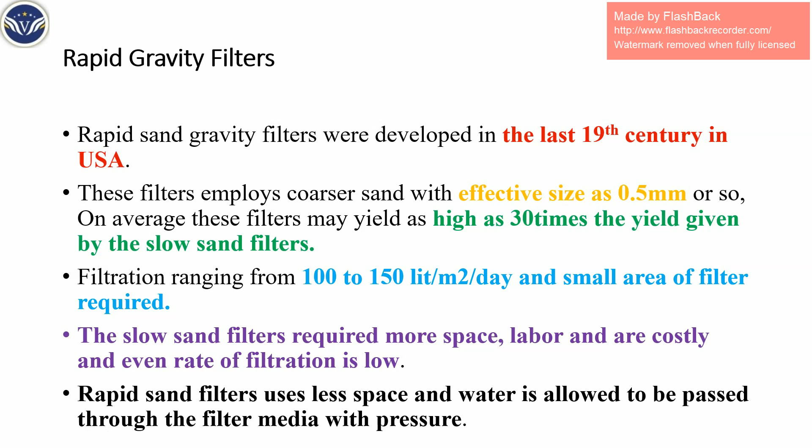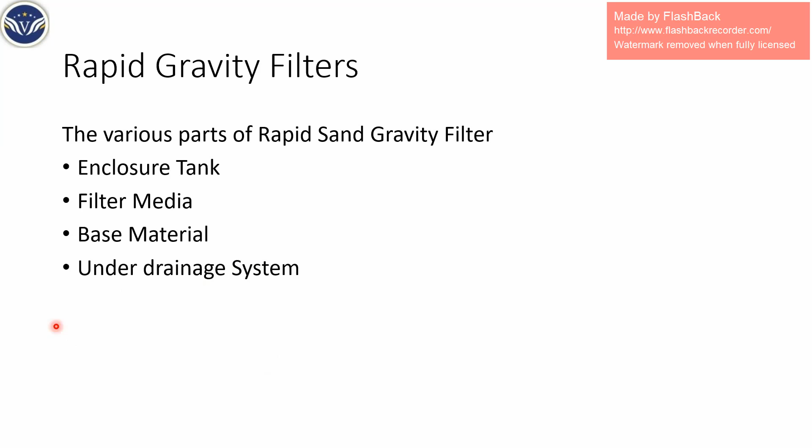So the rapid sand filter requires less space, and water is passed through the filter media with a certain pressure. Now, the rapid sand filter consists of various parts. The first one is an enclosure tank, then filter media, base media, and the under drainage system. We are going to see these one by one, and the under drainage system has two objectives, which we will also see.

The enclosure tank, as in the slow sand filter, is a watertight rectangular tank built of masonry and concrete. The depth varies from 2.5 to 3.5 meters, and for each unit the area is generally limited to 10 to 80 square meters.

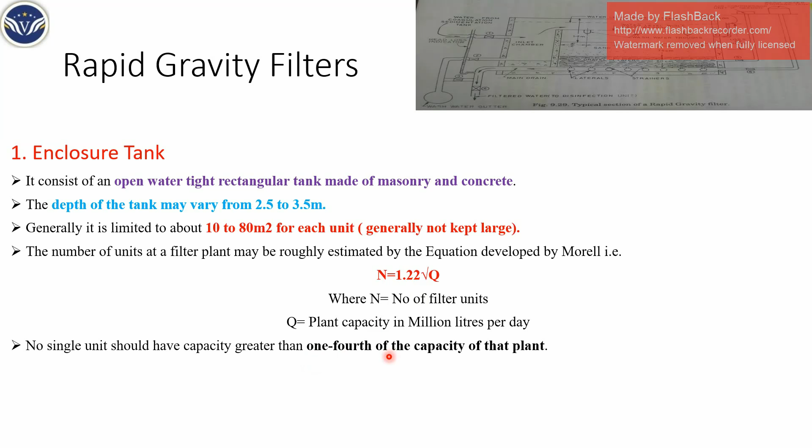Here is an equation to find out the number of units. n is the number of units, and we can find it using this equation: n = 1.22 √Q, where Q is the plant capacity in million liters per day. No single unit should have a capacity greater than one fourth of the capacity of the plant. So we use this equation here.

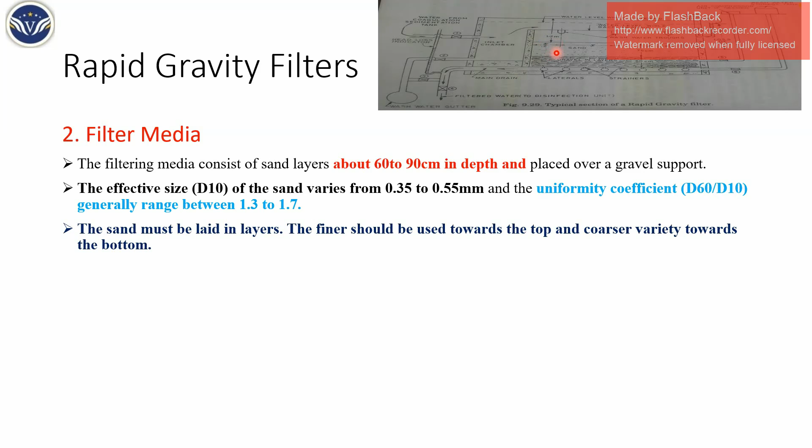Next one, the filter media. The filter media generally has a depth of 60 to 90 centimeters, and it is supported by the gravel media. The effective size D10 varies from 0.35 to 0.55 mm, and the uniformity coefficient D60 by D10 varies from 1.3 to 1.7. There is fine sand at the top and coarse sand at the bottom, and it must be laid in layers, generally around 3 to 6 layers.

The base media, or base material. The base material supports the fine sand, or filter sand media. It is laid in around 5 to 6 layers, and it should be free from dirt, clay, and any organic matter. It should be hard and durable.

The top layer is about 15 centimeters and the grain size is between 2 mm to 6 mm. The intermediate layers are again 15 centimeters and 15 centimeters, and the grain size varies from 6 mm to 12 mm and 12 mm to 20 mm. The bottom layer should be 11 centimeters, and the size here varies from 20 mm to 50 mm.

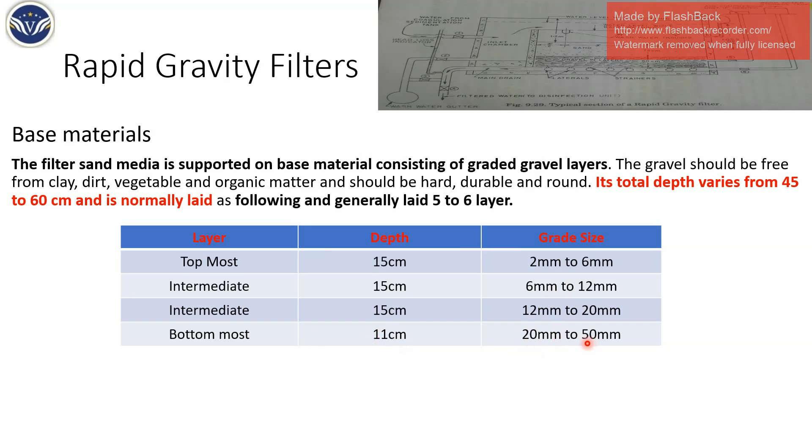The under drain system. So here the unique part of rapid sand filter is the under drain system. In slow sand filter, the under drain system is used only to receive the treated water and to deliver it to water supply lines. But here it serves two purposes. One is it collects the water which has been filtered. The other one is backwashing. So it helps in cleaning the filter. Backwashing is nothing but it will help the filter to clean itself.

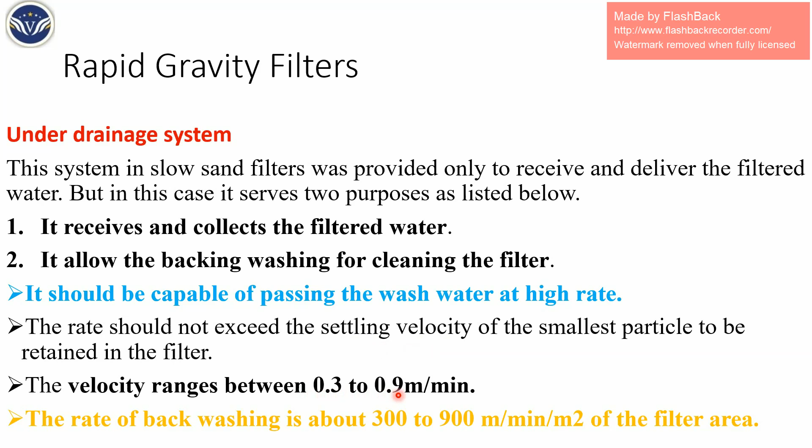It should be capable of passing back water or wash water at a very high rate, because only when you pass it at a high rate can the cleaning take place. It should have a non-settling velocity. Please remember this thing. And the velocity will range from 0.3 to 0.9 meter per minute.

Next one, under drain system. Here it has got two drainage systems. One is the perforated pipe system, another one is the pipe and strainer system. Again they have got various forms, like manifold and lateral system, Wheeler system, and porous plate system. These are the different systems.

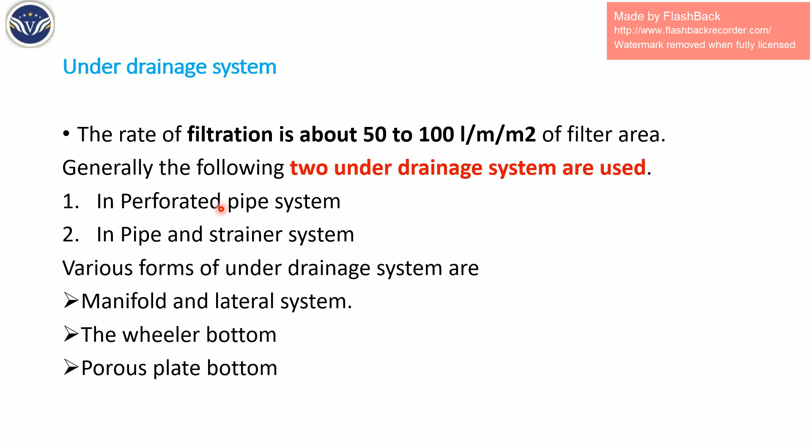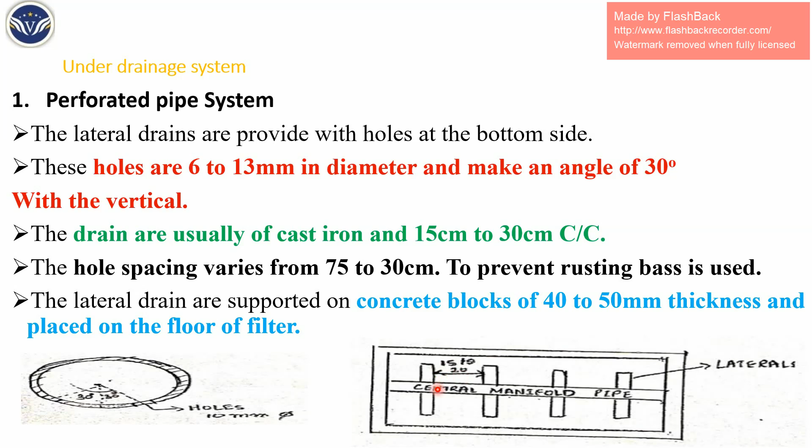Usually it is made of cast iron and the center to center spacing is between 15 centimeter to 30 centimeter. The hole spacing is between 75 mm to 30 centimeter, the spacing of the holes bored here. To prevent rusting, they use brass material in this part, and these laterals are supported by concrete blocks of thickness 40 to 50 mm, placed at the bottom on the filter floor itself. So this is all about the perforated pipe system.

Next one, the pipe and strainer system. This will be of an umbrella shape, or of a cylindrical shape. Here the strainers are inserted into the lateral by drilling holes, and they are usually of brass or bronze material. They are made in an umbrella shape; you can see this one is of an umbrella shape here, or sometimes a cylinder.

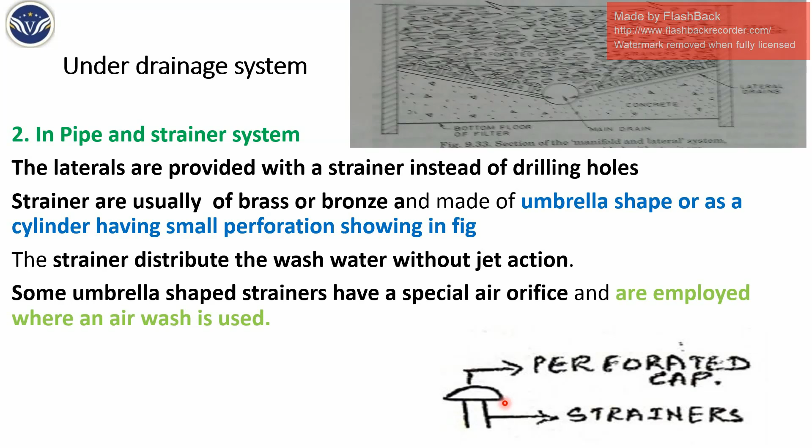Here the wash water comes out from this drain without having a jetting action. If it has a jetting action, it disturbs the filter media, so jetting action should not be there. It has a non-jetting action. And sometimes a special air orifice is employed. Why is it employed? Because air wash is used. We pass compressed air in this system, and by doing so we clean up the filter media itself. So this is about the pipe and strainer system.

Now we will see the working and cleaning operation. This is a rapid sand filter. You see here the valves 1, 2, 3, 4, 5 and 6. The first one is the inlet raw water pipe, where the raw water enters this chamber, called the inlet chamber. The second valve is a wastewater valve to drain out the inlet chamber. If you want to drain out the water, this valve is used, and it is connected to a gutter, or we can say a drain.

Next, the third one is a wastewater valve connected again to the main gutter itself. Sorry, the fourth one. The fourth one is a filtered water supply pipe which is connected to a distribution unit.

The fifth one is nothing but the wash water supply valve. And the sixth one is nothing but the compressed air valve itself. So remember these valves. These are very much important to understand the cleaning process or how it works.

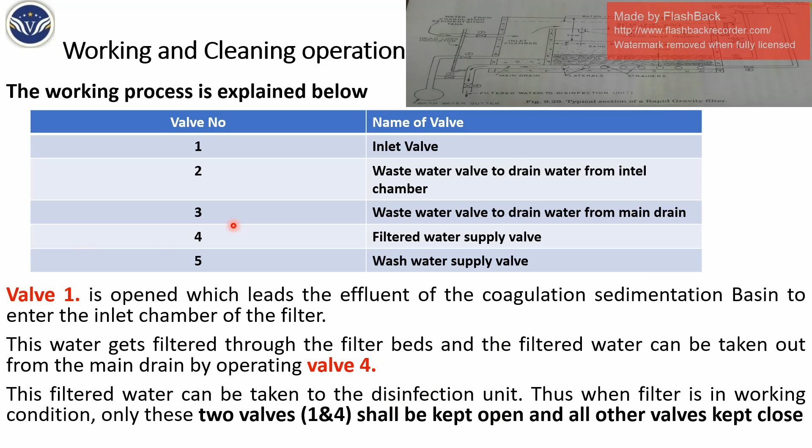So water enters this inlet chamber, passes through the filter media, laterals, then to the main drain, and from there it passes through valve number 4, which is connected to the distribution network or to a disinfection unit, and water is collected. So this is all about the operation or working itself.

Now backwashing. When the backwashing is done, here you can see there is a head loss indicator. When you have excessive head losses or the sand becomes dirty, there is much head loss. The filter is getting clogged. Due to that, filtration is not taking place. So at that time we use the cleaning operation.

Now for the cleaning, the raw water supply as well as the filtered supply is cut off. So valves 1 and 4 are cut off. As per this statement, we will put an upward movement of wash water and compressed air through the sand particles, which removes the suspended impurities from the filter itself. So we pass the compressed air as well as the water.

And by doing so, we remove the impurities which have been clogging the filter media itself. So for this operation, we close valve number 1 and valve number 4. Now valve number 5 and valve number 6 are kept open.

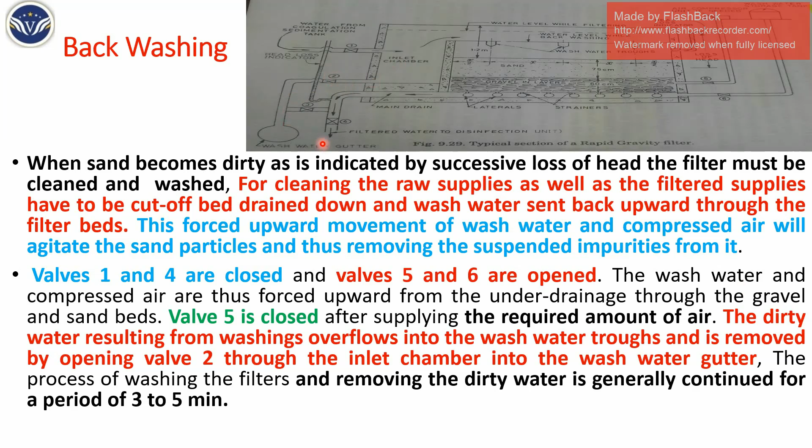Now the dirt resulting, this coagulated dirt which is coming out, has to be removed out. So that will be removed out through valve number 2. You are opening valve number 2. From here you are removing out the dirt, and that wash water is being sent to the gutter itself, and this process will continue for 3 to 5 minutes until all that dirt has been removed out.

Next, what happens here? After this process has been completed, you close valve number 2 and valve number 6. Then you open valve number 1 and valve number 3, not valve number 4. That water is not to be collected for filtration again. It has to be thrown through the gutter only, because there will be some impurities left. Certain particles will be there that should not be sent to the distribution network or disinfection unit.

The remaining water must be removed out until a surface mat is allowed to be formed. Here the surface mat should be allowed to be formed. When it is formed, only then does the filtration take place properly. And ultimately we are closing valve number 3 and opening up valve number 4 over here. And this is all about backwashing itself.

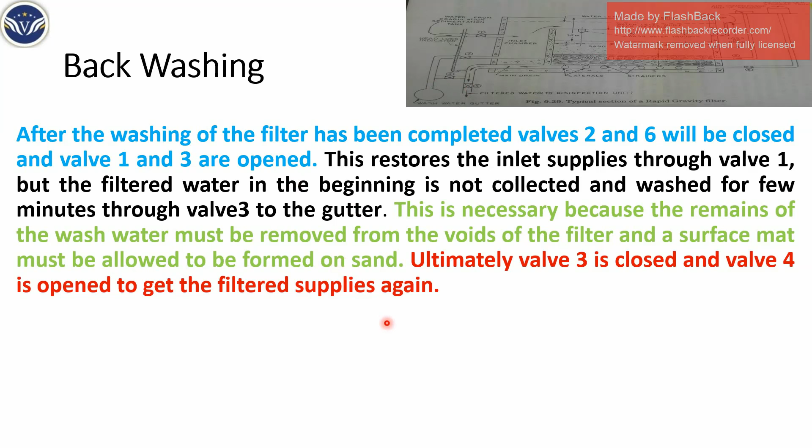You can see in the rapid sand filter over here, this is valve number 1, valve number 2, valve number 3, valve number 4, valve number 5, valve number 6. I will explain this again. When the filtration process is taking place, you need to keep off valve number 2, valve number 3, valve number 5, valve number 6. Only valve number 1 and valve number 4 are opened, and water gets into the inlet chamber, through the filter media. It percolates through the gravel bed or the base material. It is collected into the laterals, then to the main, then it is supplied through valve number 4 to the disinfection unit or the distribution network.

When backwashing is taking place, you need to cut off the raw water supply and the treated water supply. So valve number 1 and valve number 4 are closed. You are opening valve number 5 and valve number 6. The wash water as well as the compressed air is passed through the gravel layer, gravel bed and through the drains. When you have got a sufficient amount of air, you need to close valve number 5. Then that water enters the inlet chamber, then that wastewater you need to remove. That is removed out from valve number 2, which enters the gutters, and this process is continued for 3 to 5 minutes.

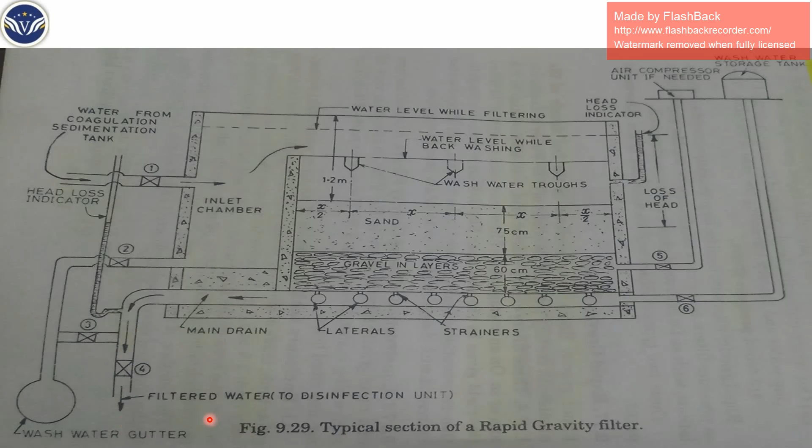You can refer to the S.K. Garg book, page number 509. And with respect to the rapid sand filter, you have it on page number 517.